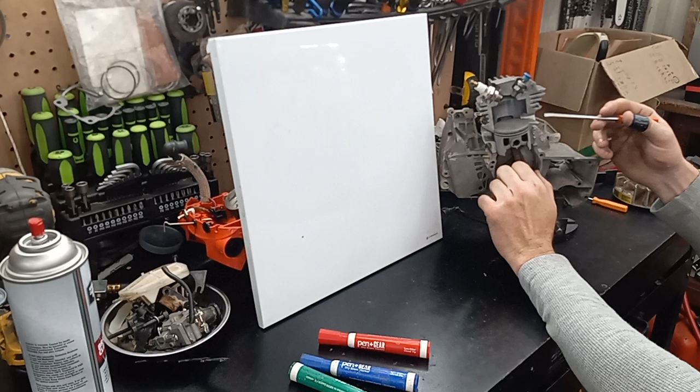So let's just say you're doing 10 degrees every time, bang, it fires. Well, you rev this thing up to say 8,000 RPM. Because the fuel burns at the same rate as it did at 1,000 RPM, you need more advance to get the fuel burning sooner, or you're going to be getting less power at higher RPM, and so on and so forth.

Like when I was building race engines, we would run anywhere between 34, 38 degrees total timing advance, which means at like 8,500 RPM or whatever, we would be at 34 degrees total advance before top dead center, and that's because fuel burns at a given rate.

You can change the rate of how the fuel burns by adding oxidizers and stuff, but even after you've oxygenated your fuel, it still burns at a given rate. You need timing advance - that's why a lot of coils and stuff have like a curve built into them.

They start out sometimes at 0 or a little bit behind 0 so you can start them, and then as it speeds up, the dwell time and everything changes on the coil, and you get a timing curve. So like say if this is at 1,000 and this is at 8,000 or whatever, it has more timing advance.

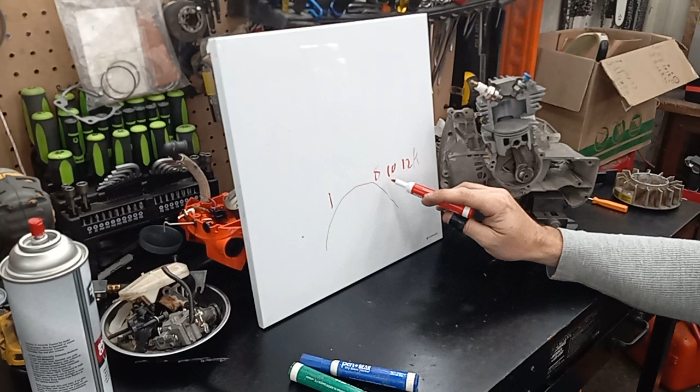Well, when you modify these things and you're pushing higher up in like the 10 and 12K mark, you need to reclock your flywheel to take this curve that it's got and essentially bump it over, so you can extract more power for your port work. And that's how that works.

I typically like to advance it, if it's one I'm ringing to the moon, until I get too much timing, and then you'll hear it popping in the cut, and then typically I'll just back it off between 5 and 10 thousandths after that and see how it behaves. Sometimes I'll back it off 5 thousandths and then play with the plug gap. You can play with your plug gap too, and it changes the amount of time it sparks.

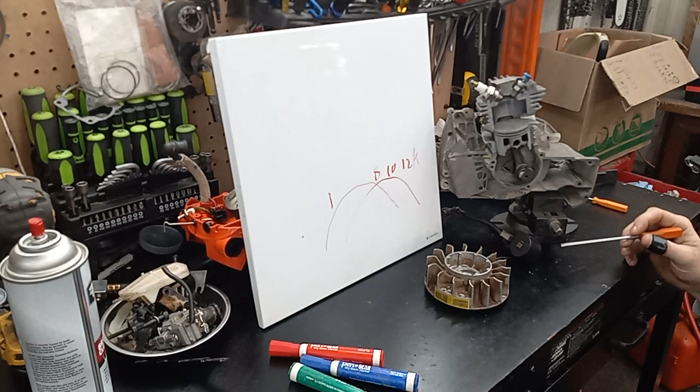But how are these little engines getting their ignition? You've got a pair of magnets right here that, when they pass the coil, create and break a magnetic field which induces a voltage in here - this is essentially a step-up transformer. It induces a voltage into the low side, then as soon as it passes, the field is broken, it jumps over to the high side, which ups the voltage considerably.

And what the voltage is on these, I don't know. It's probably in the 20,000 range or so.

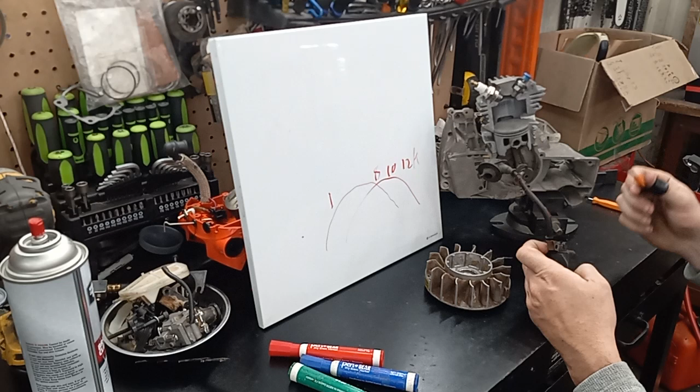That voltage is derived from how many coils of windings it's got in there. Then that's stepped up, and it runs up because it's looking for the shortest path to ground. It runs up the plug wire to the plug, and then it jumps over because the spark plug's grounded. It bridges that gap right there, and that's what gets your spark.

And changing the resistance of your plug can make the coil work harder, and you'll end up getting a hotter spark.

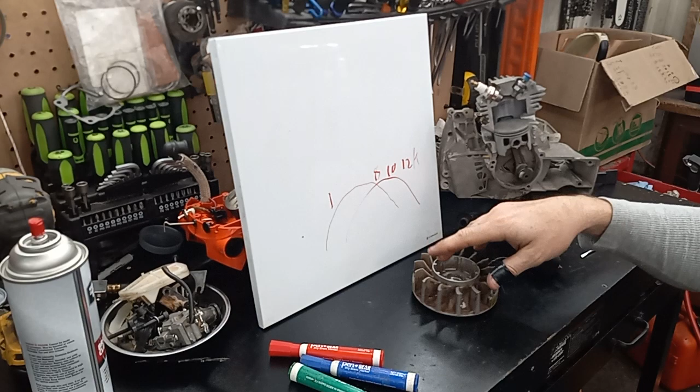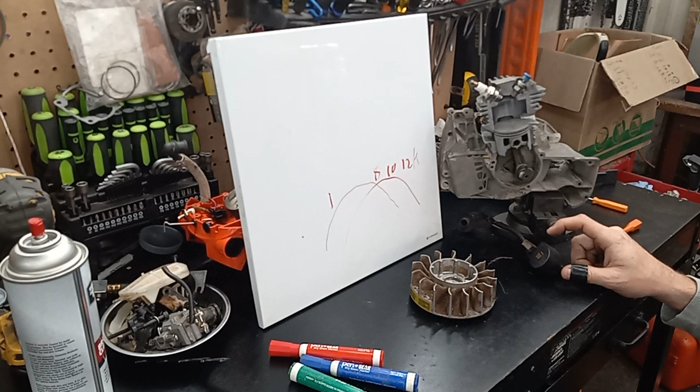The downside with these is after a certain RPM, you run out of dwell time. A lot of coils need to spin at a certain speed to get enough voltage to get a good strong spark, but after a certain speed, it's so fast that it's actually losing saturation time, dwell time, whatever time it needs to saturate fully to get a good spark. That's why a lot of coils fizzle out at higher RPM.

And on race cars and stuff, that's why they do capacitive discharges and higher voltage coils, coils that are better suited for higher RPM because they need less dwell time or whatever. But that's how that works.

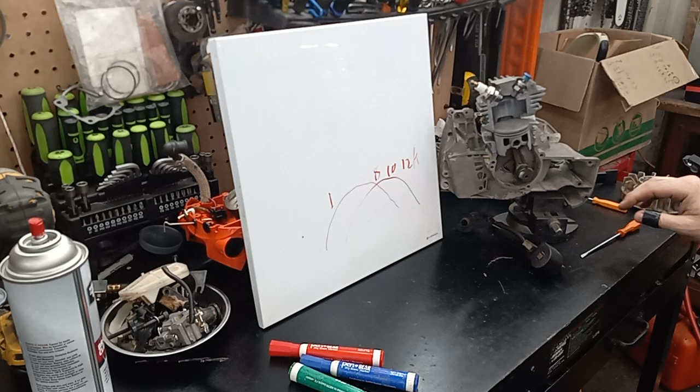And as far as fuel is concerned, you got 87 octane. That's what I run on all my stuff. When you add your two-stroke oil, it ups the octane automatically. I like 87 because it's a more reactive fuel than, say, 93 or 110.

Where you run into needing more octane is if you've jacked your compression up so high that when this is coming up, if it's pre-igniting before the spark plug does, which is basically spark knocking, from the heat and speed it's coming up, if this is igniting the charge before you want it to, it's putting too much negative pressure back, and you're actually losing power from the rotation in there that's pushing against you more than it's pushing on the other side. You're losing control of it.

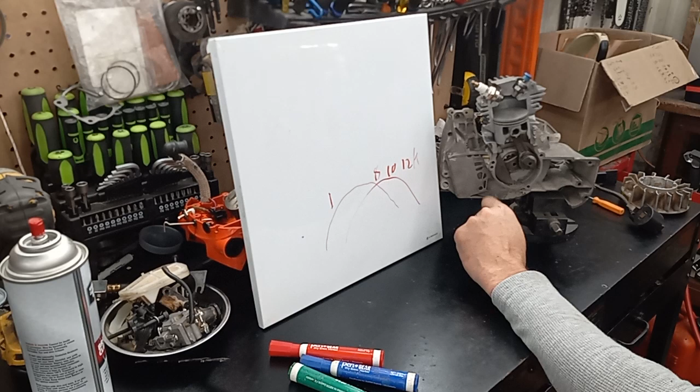That's when you need to step up your fuels. Typically, if I stay between 210 and 180, I don't have a problem with 87 and two-stroke mix. The more oil you add, obviously, the more stable the fuel becomes.

That's all you're doing - a higher octane fuel is just a cooler burning fuel, and it's actually harder to ignite. With the higher compression chamber or combustion chamber pressures, that harder to ignite fuel becomes more stable and is easier to control your fire with the plug. That's why we do that.

But I get asked all the time - there's a lot of confusion because you've got port timing, which is your exhaust, transfers, and intake. Some people work off total durations. I can do either.

I typically go by first cracks and first shut off. Like when I throw a wheel on, typically I'll come down and get this reading first. As soon as it cracks where you get your squeak of light through, that's the reading I write down. As soon as this cracks, and if it's a tapered slope like this one, I go off the one that cracks first, which would be that back one right here, and then I'll bump it back a little bit, and then I'll check when this shuts off. That's where I get my numbers.

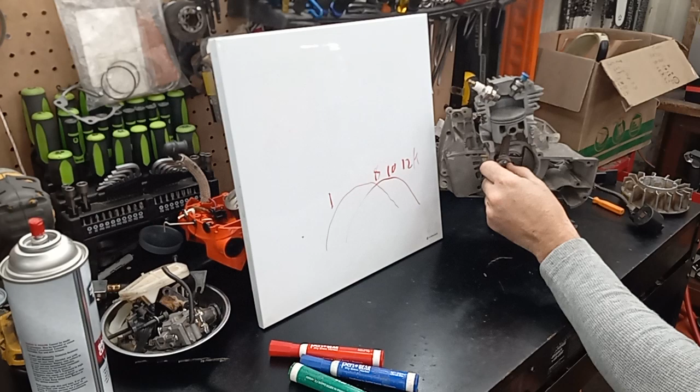If you're wanting to work off full port duration or whatever, you can use Joe's little digital wheel, and then you'd want to bring this down, bring that up right there. As soon as I shut my compressor off, it never fails - can't go without compressed air, but I swear that thing knows whenever I turn a camera on or I'm on the phone. Where was I talking about?

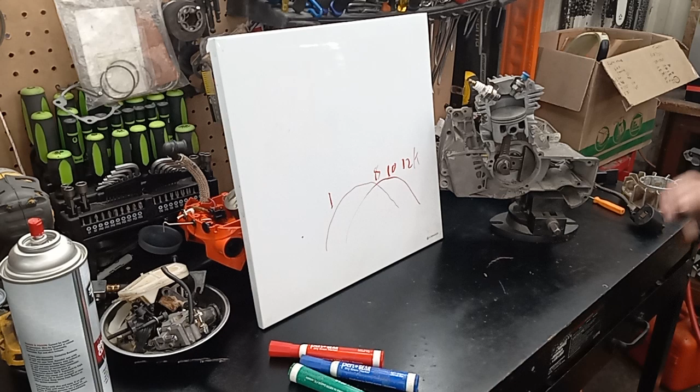Okay, yeah, with Joe's wheel on there, if you want to go off total port timing, second that cracks open, zero the wheel out, bring it all the way around until you get to the exact same spot again, and clip it off, take your reading. And then that would be your total intake timing.

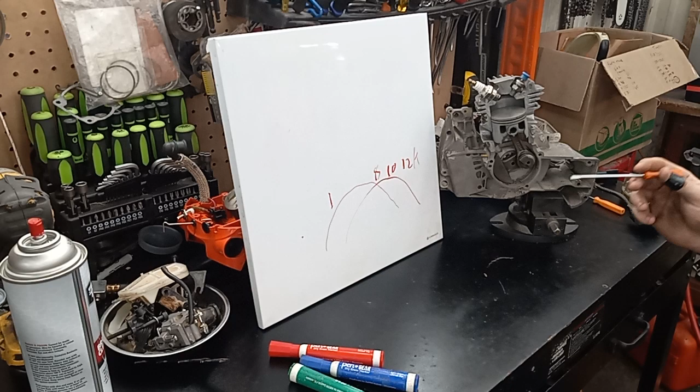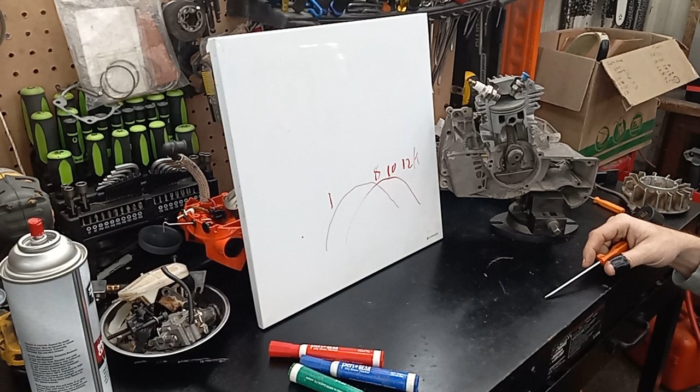Whatever that total intake timing is, divide it by 2, and whatever that number is, bring the wheel back up to where you get that divided number, and then re-zero the wheel out, and then you know that wheel is now zeroed.

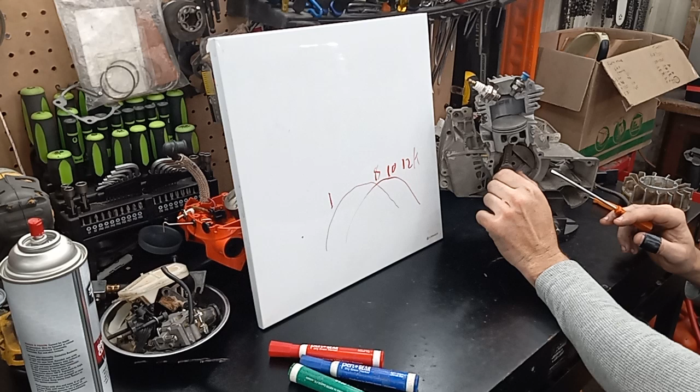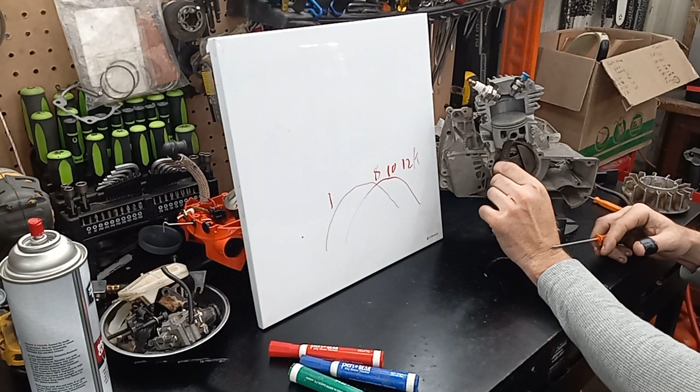And then you can come down here and check to see when your exhaust opens and when your transfers open. Same thing if you want to know your port duration with Joe's wheel: the second it cracks, zero it out, bring it all the way back around until it shuts, and that'll tell you your port duration. Same thing with the exhaust, the second it cracks, zero it out, bring it back around until it shuts back off.

For those that want to work off port timing, you can use the numbers that I go off of. If I want to know the port timing, I just do a little bit of math. Sometimes I use Joe's wheel, sometimes I use my wheel, sometimes I freeball it, especially if it's a saw that I've done several of and know how they behave. It just depends on what I'm trying to do with the saw.

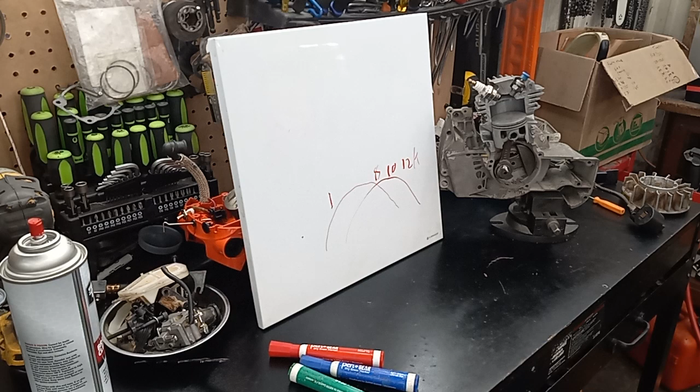But let's get back to talking about ignition timing. There's a few different ways of achieving it.

Sometimes I will come in here with a Dremel and carve out the key slot right here. If the keyway is in the flywheel, sometimes I'll carve off a little bit on the keyway. Sometimes if there's a lot of play in the bolts, you can get around it by rotating your coil a little bit.

I typically like taking it off the keyway if it's in the crankshaft, because if all else fails, you can either buy another keyway or slip in filler material to keep backing it off. In that video I showed where I slipped a little piece of filler material in,

then brought the flywheel back up tight to the filler material, and I left that in there. I didn't build another key, I just used it to hold the flywheel in its exact location where I wanted it, and snug the flywheel down.

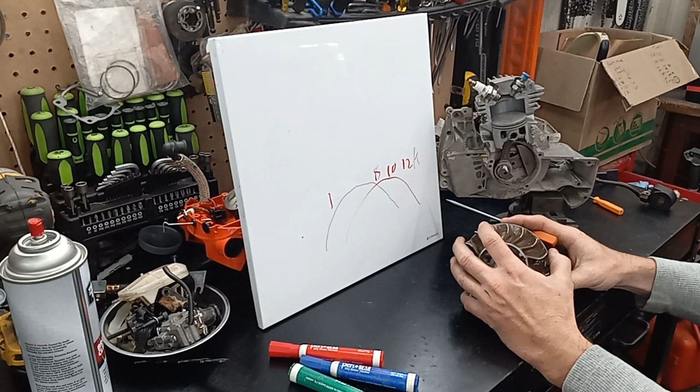Once the flywheel's down, it holds tight on the taper unless something catastrophic happens. I have seen steel flywheels, plastic fin flywheels, and composite flywheels blow up and lock up suddenly, and actually shift their core magnets.

I had a 660 once that nobody could figure out. It came in, blew up, the guy rebuilt it, and he could not get it to run. Then I did some investigating and found out that the magnets had shifted on the flywheel.

So that's one bad thing with those composite flywheels. Plus side is they're pretty light. I prefer a composite flywheel over a style like this one. That's just me though.

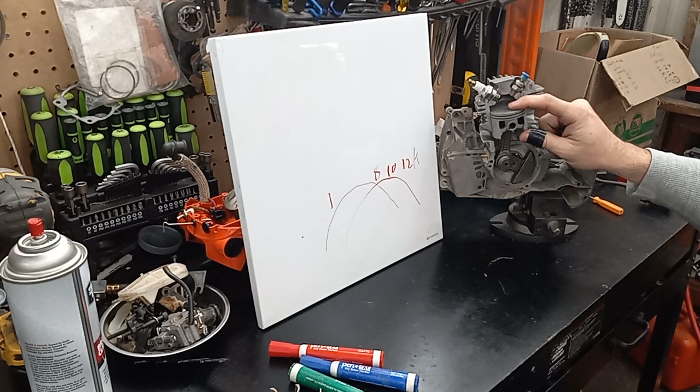So that's why we advance the timing. If you get too far advanced, it's almost like the same thing as spark knock. If it's not pulling enough RPM where you need it, you're actually sparking too soon, and it's putting great amounts of pressure on there.

But the reason we advance it is because fuel burns at a given rate, and as RPM increases, you need more timing. The harder you spin it, the more time you need to get that fuel to burn. So I hope that helps somebody out.

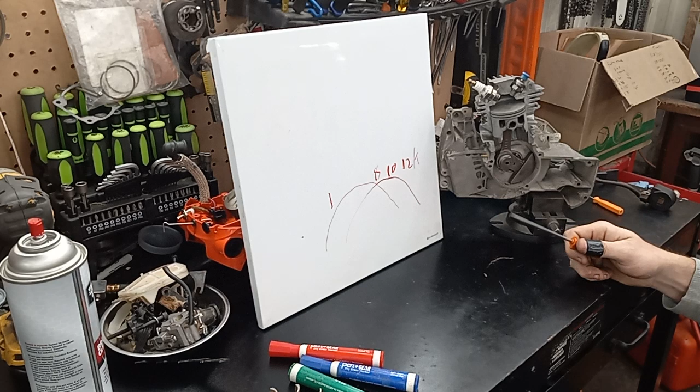I'm not going to make this a real long tips and tricks video. It's hard to keep answering questions, and it's hard for me to get what's in my head out across my mouth and onto the board. Other people make it look easy, but that's the gist of timing advance. I hope it helps somebody out.

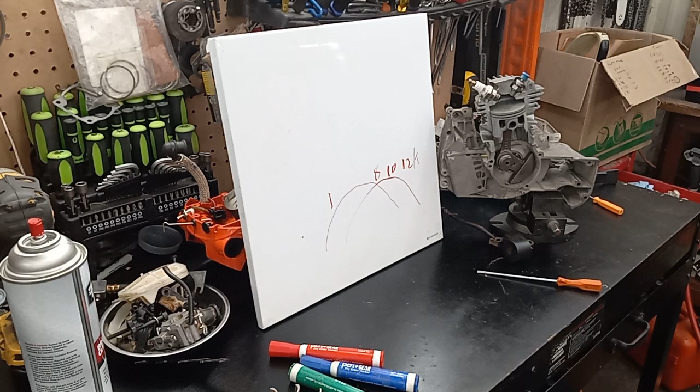There's quite a bit of stuff that goes on with an ignition. There's stuff people don't think about, like dwell time and saturation time of the coil, all that good stuff.